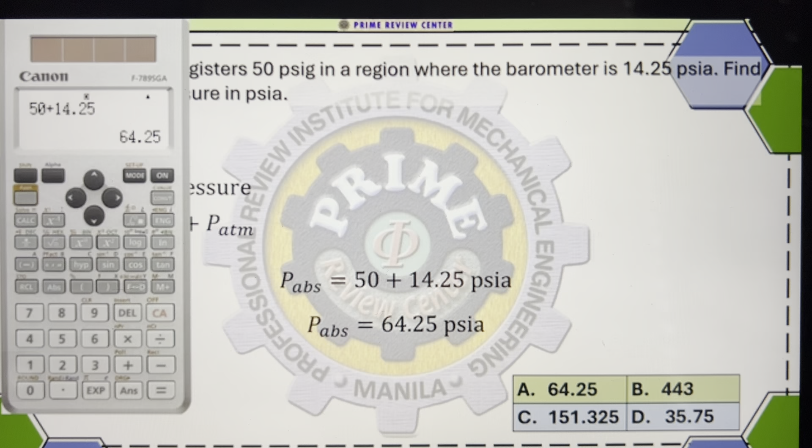So, pag hanapin sa absolute pressure, simply add the gauge tsaka atmospheric. So, that is simply 50 plus 14.25. So, automatic PSI na yan. So, complete lang natin sa calculator. And so, meron tayo dito 50 plus 14.25. So, by the way, yung unit na to, automatically PSI absolute. So, press FD para sa decimal, that is 64.25 PSI. From the choices, yung letter A.

Sige, so another problem from our power industrial plant engineering. So, basahin ko lang. A pump discharges 50 tons of water per hour to a height of 8 meters. The overall efficiency of the pumping system being 69%. So, calculate the output and input power. So, to solve this problem, we are going to recall yung output power ng pump.

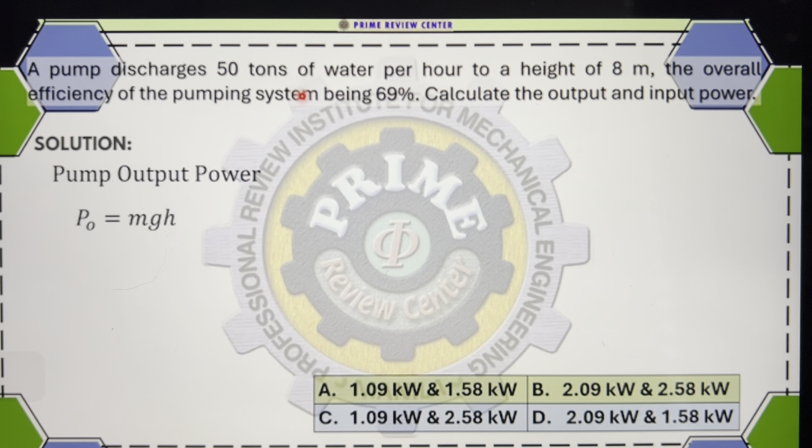So, yung pump, yung formula niya will depend on the given problem. So, minsan, kung ang given sa kanya ay volume, then gagamitin yung gamma QH. Kung sa problem na to, ang given ay tons, so that is mass. So, pag given ka ng mass, gagamitin mong formula sa power ng pump should be yung potential energy, that is MGH. Yan yung ating tinatawag na pump power. So, from the problem, meron tayong 50 tons per hour. Yung G is constant, that is 9.81. Then meron tayong height ng 8 meters.

So therefore, we can now solve yung power output. However, we need to convert muna yung tons. So we will consider this as metric ton since SI yung ibang given, 8 meters, di ba? So multiply mo ng 1,000, cancel yung tons, ang matitira sa atin, kilograms. So, ang kilogram, pag sinama mo sa meter per second squared, that is Newton. Okay? So, yung hours, palitan natin siya ng seconds. So, i-divide natin ng 3,600. So, cancel out yung hour.

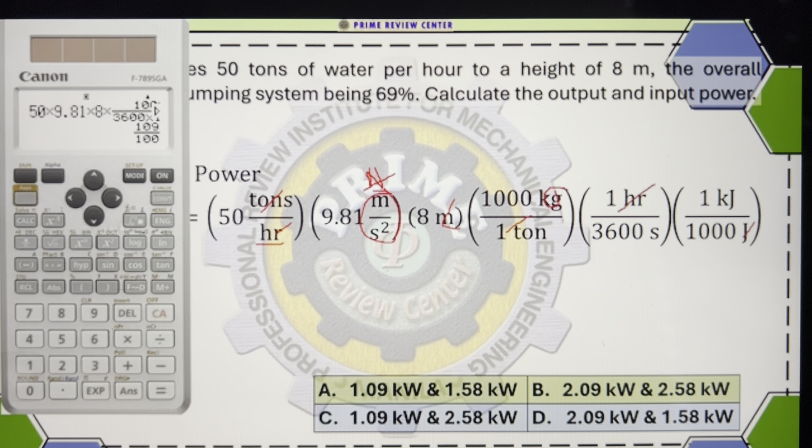Pero meron tayo ditong Newton meter. Newton meter is joule. Kailangan natin kilowatts. So, para maging kilojoule, you need also to divide it again by 1,000. Cancel yung joule, saka yung Newton, saka yung meter. Itira, kilojoule per second, that's basically kilowatt. So, pag pinindot na natin to, kilowatts na agad yung lalabas. So, that's 50 times 9.81 times 8 times 1,000 divided by 3,600, times 1,000 sa ilalim. So, press equals, press FD, yung value ng power is equivalent to 1.09 kilowatts.

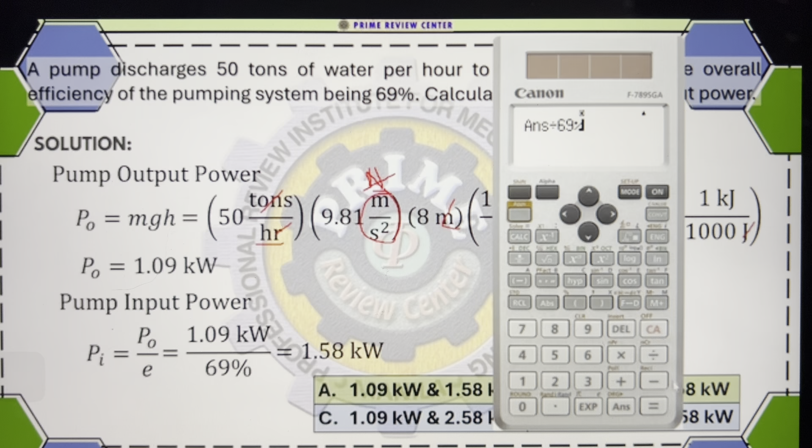So, pag tinignan yung choices, marami pang 1.09, dalawa pa, letter A or letter C. So, we needed to compute pa yung isa pang hinahanap, which is input power. Ito ay isang pump, that is power consuming device. Pag power consuming device, dinedivide ang efficiency sa power output. So, therefore, we simply divide yung 1.09 sa 69%. Press FD para sa decimal, ang lalabas dyan ay 1.58 kilowatts. So, from the choices, ang fit sa ating answer ay letter A, 1.09 kilowatts and 1.58 kilowatts.

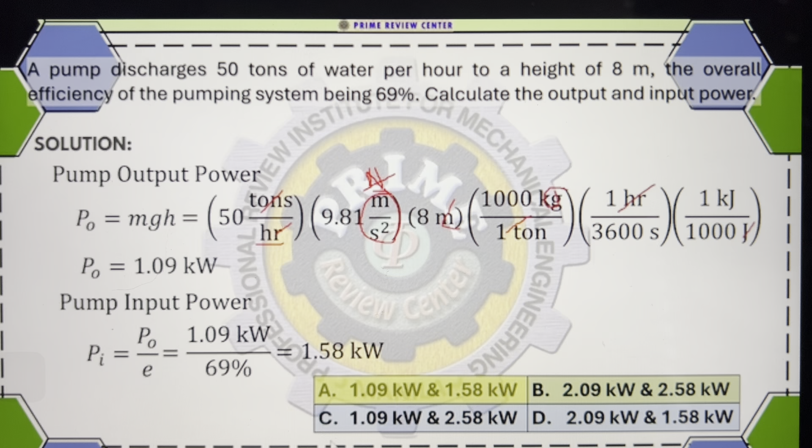Okay, so another problem from our power industrial plant. So oil flows full bore at a velocity of 2 meters per second through a nest of 16 tubes in a single pass cooler. The internal diameter of the tubes is 30 millimeters and the density of the oil is 0.85 gram per milliliter. Find the volume flow in liters per second. Naghanap ng volume flow. So, paano natin ito solve?

So, to get yung ating volume flow rate, we needed to use yung formula natin sa thermodynamics. Pag meron kang velocity, tapos pwede kang makakuha ng area since may diameter, then you simply multiply yung area times velocity. Then, since sa problem meron kang dami ng tubes, we needed to add yung number of tubes na yan.